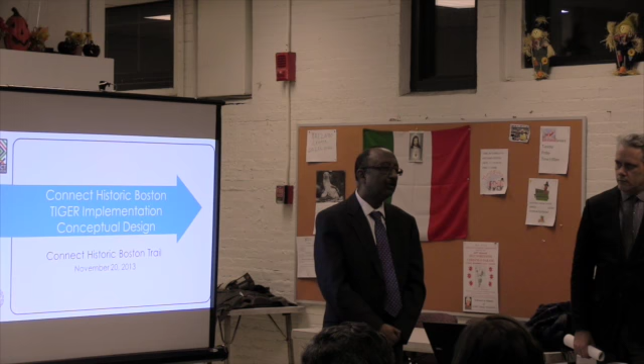About two years ago, we came to your community and did some presentations on installing what we call a cycle track, which is a protected bike lane in either direction, protected in the sense that it's a portion of the road that pedestrians and cars cannot use.

Through those community meetings, you said, this is a good idea, but does it really work? Because you're taking away so much parking. This is a good idea, but what are the real implications?

As a result of your comments, we heard you loud and clear, and what you have on that section of Commercial Street are really two bike lanes, standard bike lanes in each direction. We didn't lose any parking, and that's the facility we have today.

So I just wanted to start the meeting by saying that's where we are coming from, and we realize that you care about bicycles and making sure they are accommodated, but you also care about pedestrian friendliness, making it safe for pedestrians, and you also care about ensuring that all the parking spaces on Commercial Street, each and every one of them, continues to remain.

So the proposal that we have for you today, we think accomplishes all those three things. Not only does it have a cycle track, a protected cycle track that is safe for bicycles, not only is it making it safer for pedestrians, but it's also protecting each and every parking space in this corridor. So that's my introduction. We'll get into the details of what this proposal is in a second.

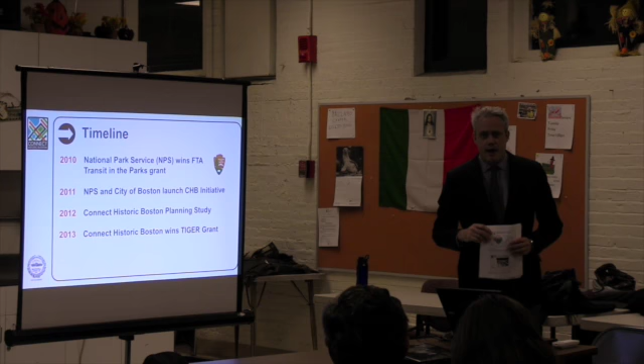And then in 2013, this past summer, the city won a very competitive process called the Tiger Grant. Tiger stands for Transportation Investment Generating Economic Recovery. So there you go, that's what Tiger stands for. Very apropos for a federal program. And because it's about economic recovery, there is a fast track in the grant, so construction is anticipated to begin next year.

So the Connect Historic Boston Initiative, these were some of the main products of that effort. It developed guidelines, and we'll talk about some of those tonight, on how to make it easy to travel throughout Boston and how to connect between the different modes. The guidelines address those principles. And I'll show later, there is a website for the project, and I'll show the address. All this information is available on that website, so I encourage you to take the time to visit it and review this information in more detail.

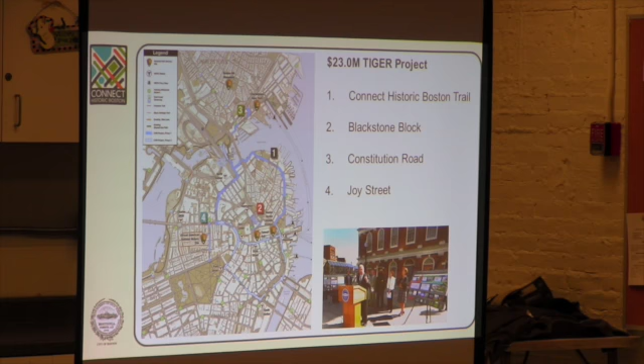I want to focus on the components that were funded through the federal Tiger grant. The first phase is what we're calling the Connect Historic Boston Trail, shown here in blue. Tonight we'll be talking about Atlantic and Commercial. Tomorrow night there's a public meeting about the next piece of the trail on Causeway and Staniford Street. There are also other community meetings happening about the project on Constitution Road in Charlestown, as well as the project on Joy Street in Beacon Hill.

So again, we're here to talk about this phase one of the trail, the pieces I talked about, and a closer look at the context for the trail.

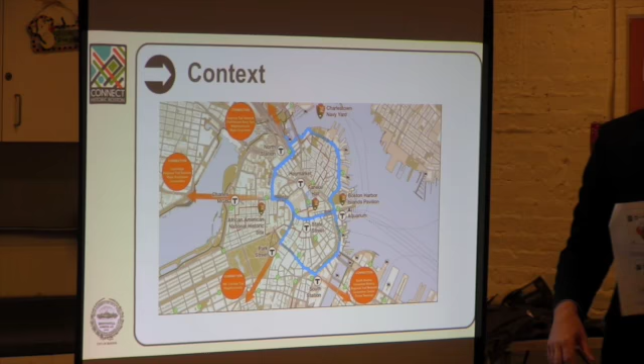Again, the vision is to create a trail. We call it a trail because our goal is to bring the experience of an off-street trail to the streets, to create a safe, comfortable environment for walking and bicycling on city streets. The goal is to connect destinations throughout downtown to the regional trail network, connecting to the trails along the Esplanade, to other communities, the Southwest Corridor, or other communities adjacent to downtown.

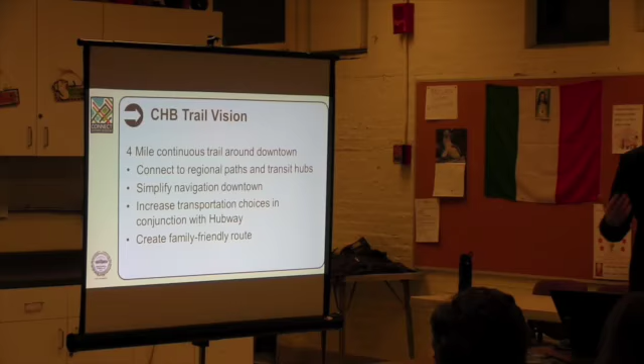The blue line shows what we see as the backbone of that downtown trail. It's a 4-mile continuous facility, and our goal is to help simplify navigation. Those of you who try to bicycle downtown know that it can often be difficult. The one-way streets or challenging streets can make it difficult to navigate.

So we want to help simplify that both for residents and visitors. We also want to increase transportation choice, providing a facility type that appeals to more people. We know some people are comfortable riding in mixed traffic or in bike lanes next to moving traffic, but we want to design a system that appeals to a broader segment of the population and create a route that works for everyone, whether it's children and families. We'll see some more images of what that means.

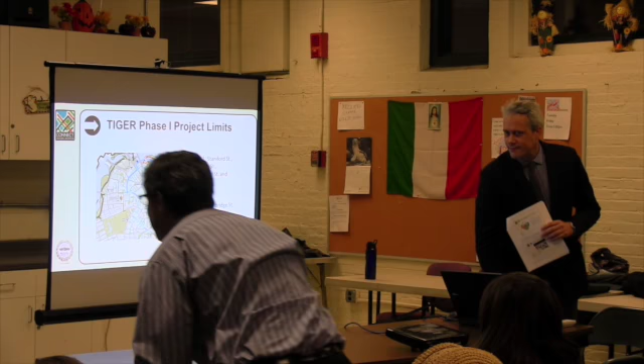So again, talking about phase one of the trail. This whole piece is phase one: Staniford, Causeway, Commercial, and Atlantic. Tonight we're going to talk about the pieces outlined in red, Commercial and Atlantic.

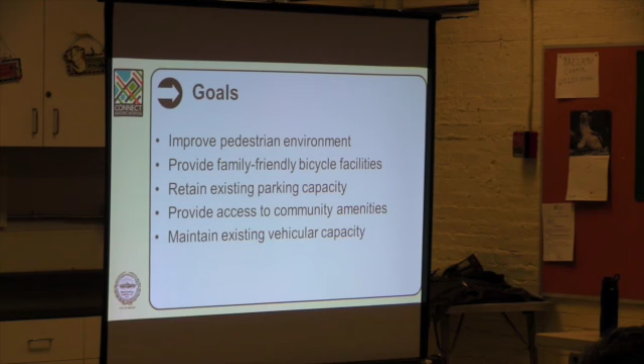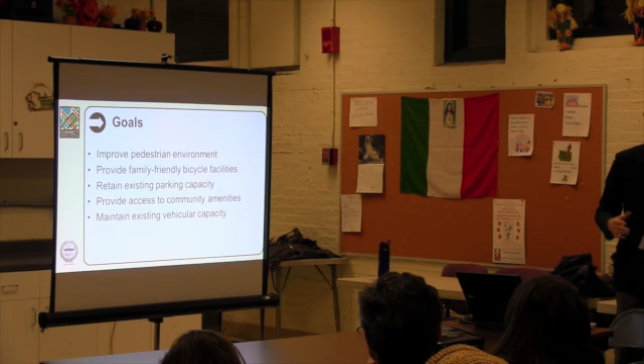I think Vineet touched on this already, but these are our overarching goals for this project. We want to improve the pedestrian environment. We also want to provide bicycle facilities that appeal to a broad segment of the population, our shorthand for that is family-friendly routes. It's important, especially in the North End, that we retain the existing on-street parking capacity. We also want to provide direct access to community amenities.

We want to help North End residents connect by bike, whether it's to the Greenway or to the trails along the Esplanade, providing those connections. It's also important we recognize that streets serve all types of vehicles, motor vehicles as well, and we want to look at maintaining existing motor vehicle capacity as part of the project.

The proposal we're going to look at tonight in detail, as was mentioned, involves converting the existing bicycle lanes to a two-way cycle track, and I'll talk about the definition of that shortly. As part of the project, we're looking to adjust the location of some street furniture and redesign bus stops to make them more efficient, but also as a way to optimize the parking capacity.

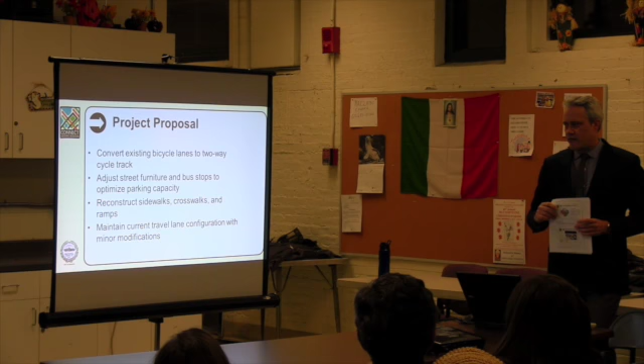We're making improvements for other users as well. We're going to be reconstructing sidewalks, making them smooth, putting in new crosswalks, and also new ADA accessible ramps for accessing the crosswalks from the sidewalk. As I mentioned, we're also maintaining the current travel lane configuration. There'll be no change to the number of lanes, though there will be some minor modifications in some locations, but the basic configuration will stay the same.

So cycle track is kind of a technical term. Another common term used for them is a protected bike lane.

The key to cycle tracks is that they provide a much higher sense of comfort for a broader segment of the population. By definition, they're physically separated from travel lanes, as well as from pedestrians and the sidewalk. They do take a little more space than bike lanes, and have special considerations for street crossings.

There are two images below, one based on research looking at the entire population to see what it would take to get people to bicycle more. We know there's a small percentage of the population, the strong and fearless, who will bicycle anywhere - they'd be okay on Storrow Drive, comfortable racing fast and riding with traffic. A larger percentage, the enthused and confident, are the ones you see commuting, mixing with traffic, riding in bike lanes.

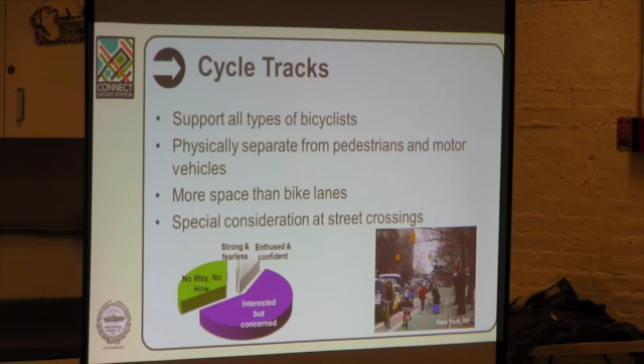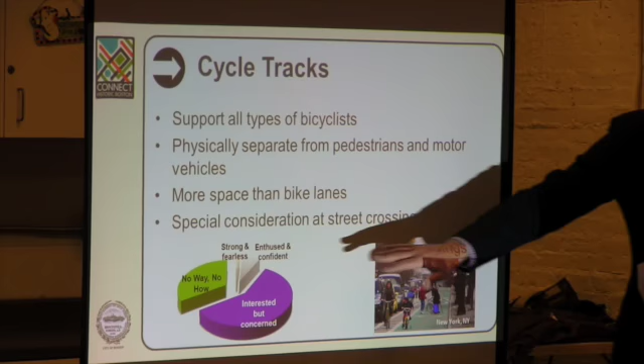There's also a population not very interested in bicycling, the green pie there - that's not a population we're interested in. But we know there's a very large piece of the population, shown in purple, who would like to bicycle but are concerned about their safety and about mixing with traffic. Provided the right facility type, they would bicycle more. That's the population we're interested in attracting with these facilities.

There's an image of a cycle track in New York City. You can see it's separate from the sidewalk, off screen. Here, on-street parking protects the bike lanes from the travel lanes.

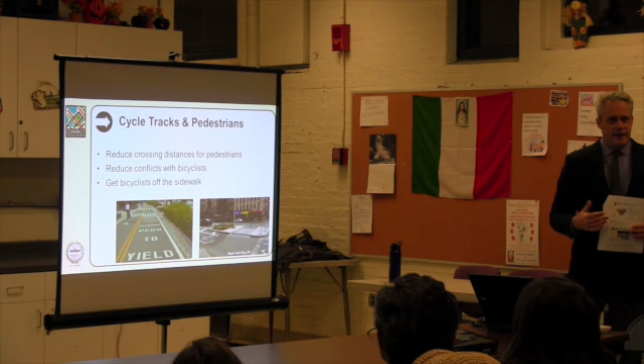As I mentioned, these facilities can also benefit pedestrians. Many of these facilities are being installed in cities across the country, and there's a lot of research being done. The research is showing that they actually have benefits for all users.

One of the main benefits is that they reduce the amount of bicycling happening on sidewalks by people who want to bike but don't want to ride in the street. A cycle track can provide a safe place for them to ride, away from motor vehicles and away from the sidewalk. They also can reduce conflicts with bicycles in the roadway.

Here are a couple of examples. They allow you to speak directly to bicyclists. In many cases, you want to have direct crossings across the cycle track, providing a method of yielding to pedestrians.

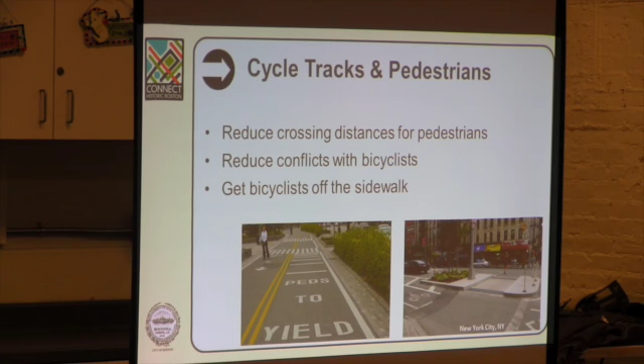One of the other main benefits is that it helps reduce the amount of roadway a pedestrian has to cross. Right now, with bike lanes, those are part of the street. With a cycle track, you're not crossing those bike lanes anymore, so your street crossing exposure to motor vehicles is about 10 feet less.

And with that, I'll turn it over to Dave, who's going to talk about our design proposal.

Thanks, Nick. My name is Dave Matt, and I'm with Howard Stein Hudson, the lead consultant on the project. We've worked with Nick and Toole Design Group on many projects throughout the city. As bicycling's been more of a focus of the city, Toole has been doing a share of that work, and Howard Stein Hudson's been working alongside them on many of those projects.

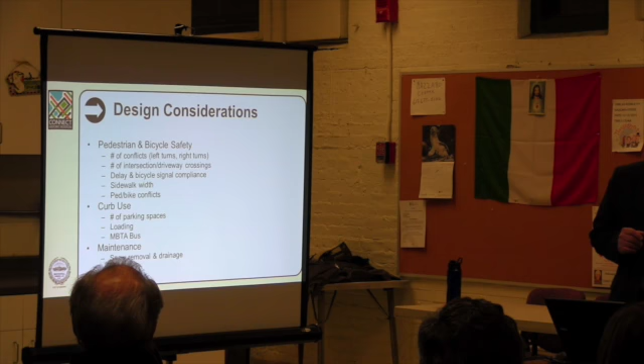When we looked at this project to determine the type of design worth considering and presenting to the public, we evaluated many different alignments of a cycle track within the North End in particular. That included evaluating the safety of where that facility would be, in terms of conflicts - whether there are many driveway conflicts or intersection conflicts with parking.

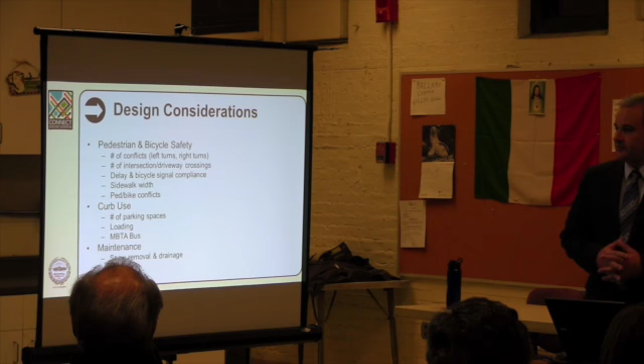We also looked at evaluating the delay for bicycles, vehicles, and pedestrians across different alternatives. And we looked at curb use - obviously the big theme here was no net loss of parking. So we evaluated concepts comparing those criteria.

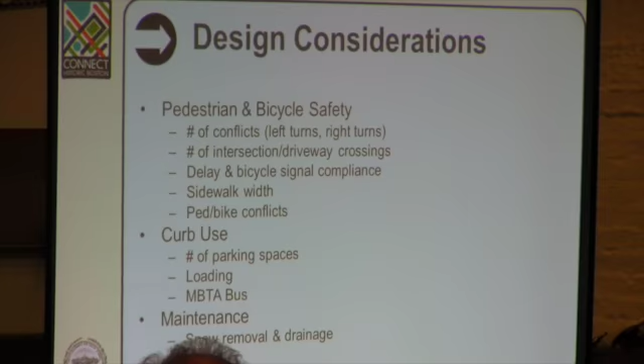We also looked at maintenance, which is going to be a big issue. It makes sense to put in a facility that can be plowed in the wintertime and is always open to travel for bicyclists. That's another thing we looked at as well - and again, the big theme: no net loss of parking.

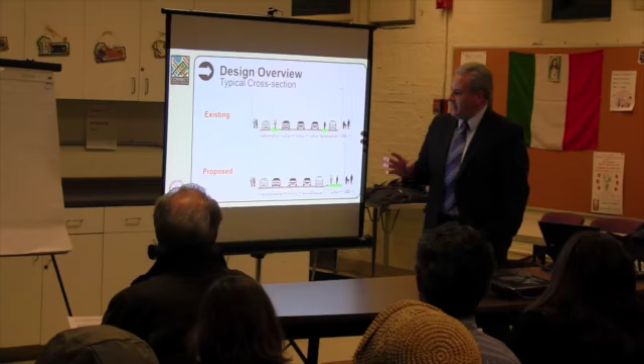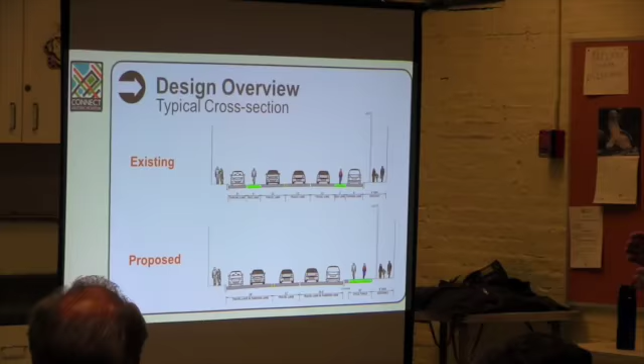So just to compare the existing and proposed here: today we have one travel lane heading southbound on Commercial Street, two northbound, and on either side there's a bike lane that exists today, and we have parking on either side. So the cross-section is limited. Obviously, we're not planning on expanding to the neighborhood side or expanding the road cross-section to the waterfront side. We're working within the existing cross-section.

So what we looked at doing is taking those two, basically a 5-foot and a 5-foot bike lane, and shrinking the lanes a half foot on both this side and this side. And what we end up with is a bike facility off-road, a 10-foot cycle track, and a 2-foot to 3-foot buffer.

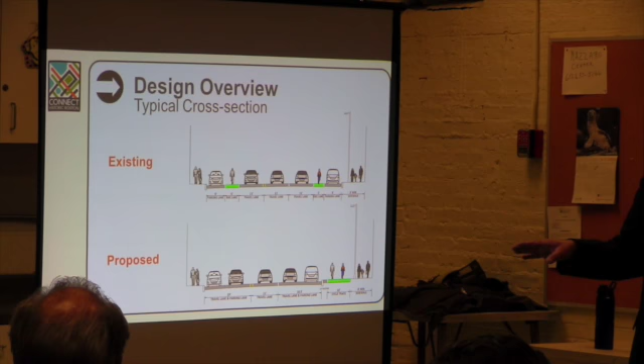It's an elevated cycle track, 6 inches above the pavement generally, and it's at the same elevation generally as the sidewalk. Now this varies throughout the cross section. I'm going to go through that a little bit here.

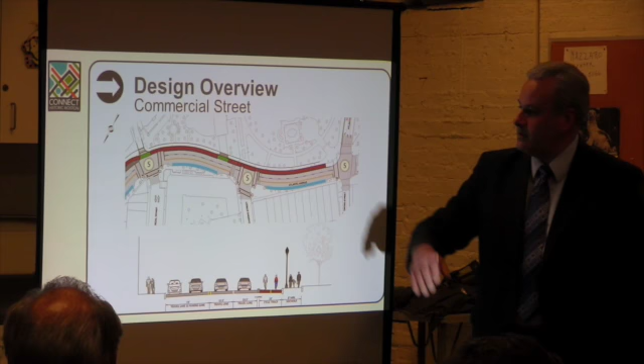The project starts at Christopher Columbus Park and heads all the way north to in front of Langone Field on Commercial Street. So this section here, which is basically from the intersection of Atlantic Avenue at Cross Street over to where Joe's American Bar and Grill is, at that signalized intersection.

Over there in that section, today there is no parking along the park side. And we recognize that as the location where there'd probably be the most friction between pedestrians and bicyclists.

So what we've looked at doing in this section only is maintaining that existing curb for the sidewalk, not touching that piece of the sidewalk. Keeping the cycle track, a 10-foot cycle track that is separated from the pedestrian realm and the vehicle realm by a 1-foot granite edge stone, and separated from vehicle traffic. So it's at the same elevation as vehicle traffic, but it's also separated from pedestrians.

There's a lot of brick paving along here that gets expensive also to replace, and so we really didn't want to get into that too much over here.

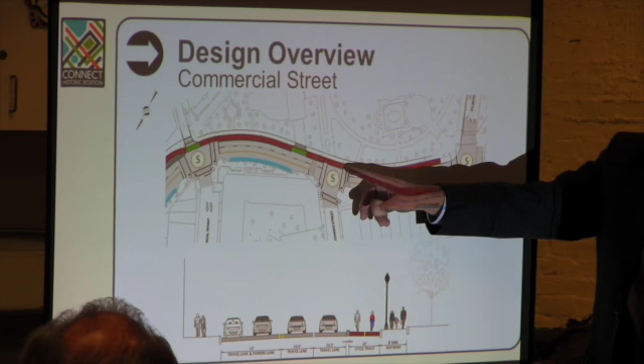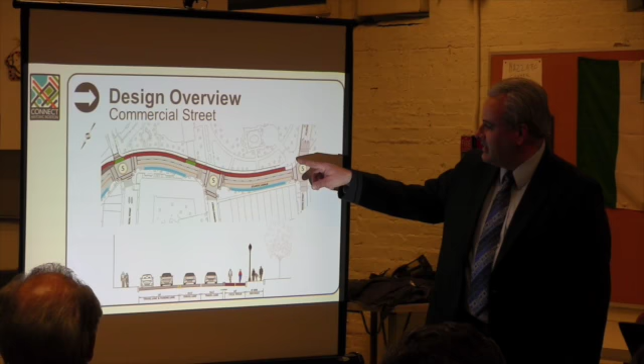At the crossings over here also, there'll be breaks in that buffer granite piece, so that we can cross through the bike cycle track to the existing crosswalks on Commercial Street towards Christopher Columbus Park. So again, this whole thing will be basically ramped down from sidewalk level and will run flush with the surface level that's out there today.

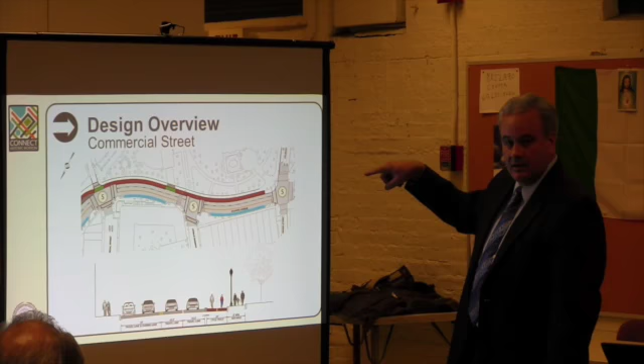One of the things that we're still working through is how this connects to the next phase of the project, how it connects to the bicycle lane that's out here today and the bicycle lane that's on Purchase Street. So we're working through those pieces of the project right now, and when we come back to you mid-December, we'll hopefully have that piece figured out. But this is the piece that we're at right now.

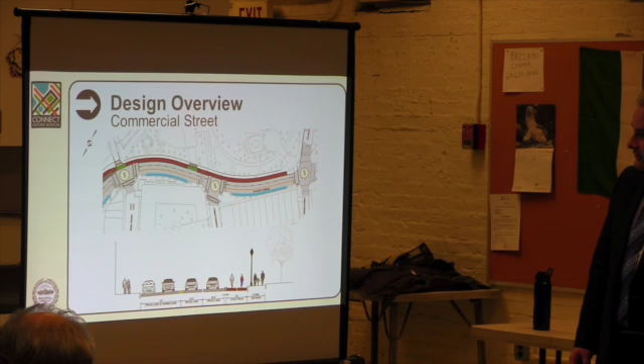One other thing I should say, for you folks that live in the North End, you might see the survey crews out there actively working. We're gathering a lot of data quickly to come up to speed to be able to submit these 25% plans in December. So you'll see crews out there working, and we're still understanding really what's out there so that we can incorporate the existing information into the design.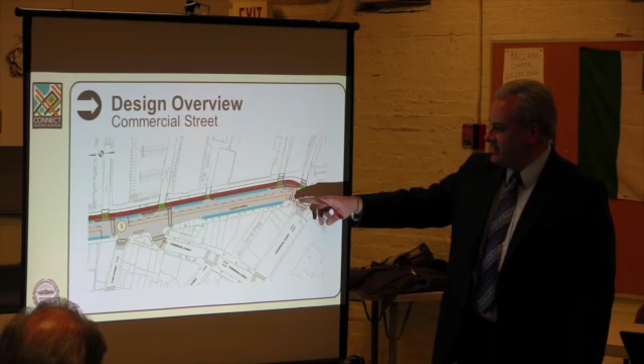So this is working a little bit further north, and this is really where the parking starts. There's a bus stop over at this location that we would maintain, and so the cycle track would ramp up to the sidewalk level.

And at every one of these driveways, you'll see as we advance through the slides, what we're doing is we're bumping out the sidewalk. So the sidewalk now would be further out into the street.

That by Joe's Aquarium? Joe's Grill, yeah, right over here. Joe's American Bar and Grill.

One of the other things is that this light gray over here basically would be a driveway treatment, a driveway ramp up to meet existing. So this cycle track would not be ramping down at any of these driveways. It'd be on a continuous elevation at the same elevation as the sidewalk.

And generally, we'll have no less than a 10-foot sidewalk throughout the project. Now, that's the other thing that's pretty important here, and Nick touched upon it: not only are we bringing the curb line out essentially 12 to 13 feet, but we're also reconstructing all of the sidewalk on that side of the street. So it'll all be a concrete sidewalk.

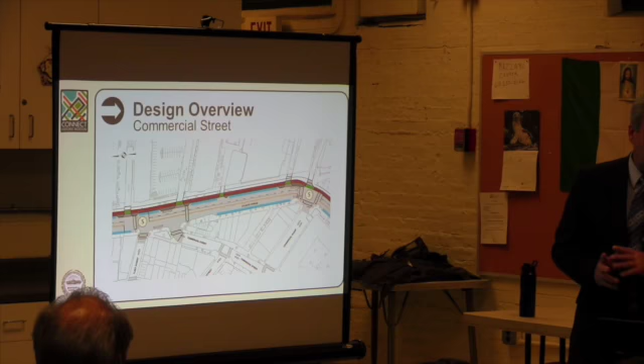And it'll be ADA accessible. Right now there are a lot of elements of that sidewalk that do not meet current ADA, and we're planning on fixing all of that. The other good thing about where we're putting the cycle track is generally we're avoiding some of the trees and other utilities that exist along the curb line.

We do plan on looking at each one of the tree pit locations, hydrant locations, street lights and signs, and relocating all of that to make more sense to separate the cyclists from the pedestrians, so there's some sort of visual division between the two.

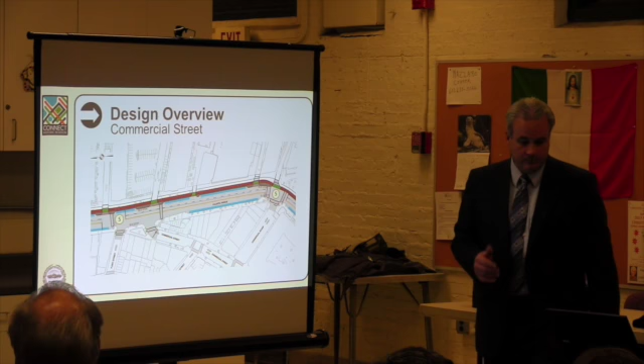The blue strips are parking. So you can see that we're maintaining the parking that exists along the curb lines there.

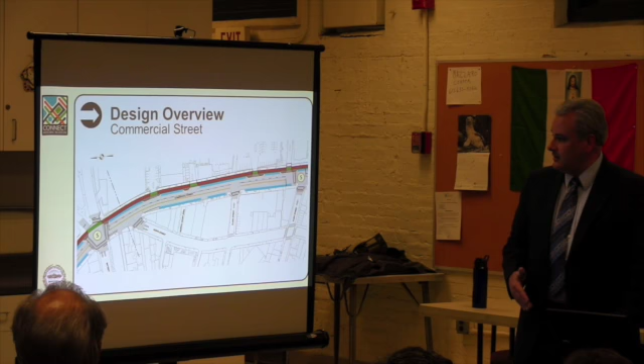So this is just working a little bit further up, again at Fleet Street, the signal there. We are bumping out so that at the ped crossing, we have a place for the peds to land outside of the cycle track and then cross the cycle track to the sidewalk side. At each one of the signalized locations where there's a crosswalk, we are bumping that out to have a landing for pedestrians beyond the cycle track.

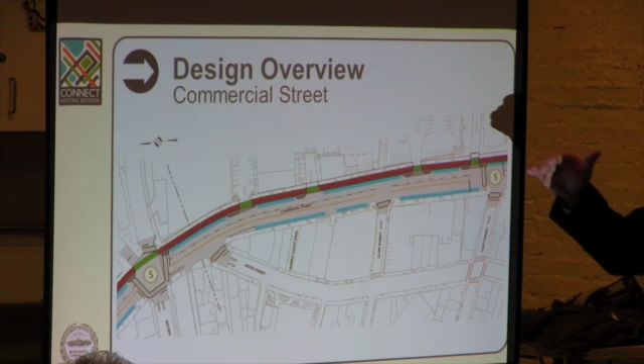On this side of the street there's less friction generally, because on the other side there's much more pedestrian activity and there's also streets. On the other side there's fewer parking spaces and some larger parking areas, but generally there's less traffic crossing the sidewalk and cycle track on that side. That's another reason why we chose that side of the street for the cycle track location.

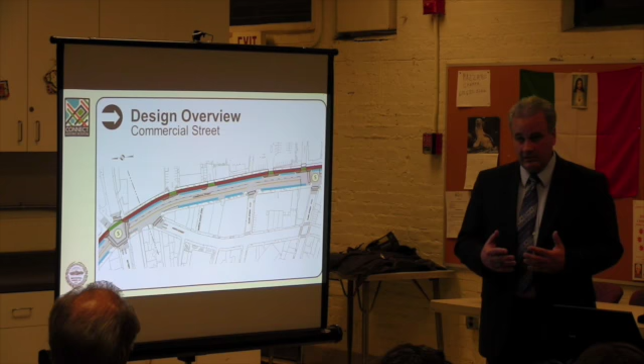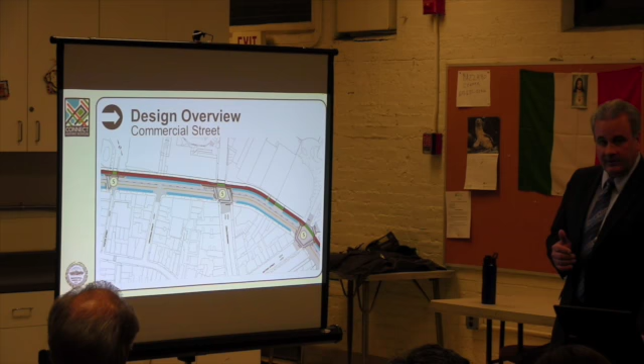We're not modifying any parking or curbs along that side of the street. We are going to look for opportunities on that side where we might be able to get more parking in. There are a couple of opportunities we've seen, so we might incorporate, or will likely incorporate, that into the plan to hopefully end up at a benefit to parking as opposed to net no loss. But it's something we're still evaluating as we get the survey in.

Here's an instance at Hanover Street where today there's a bus stop on this side of the street, and we actually gain a parking space. We lose it somewhere else, lose one, gain two. So where parking is along that side of the street might vary a little bit, but generally we're making things a little bit more efficient.

So in this area, for instance, we might locate a fire hydrant that might be restricting the potential for parking at another location. So we look at relocating hydrants or moving a bus stop to better accommodate the parking.

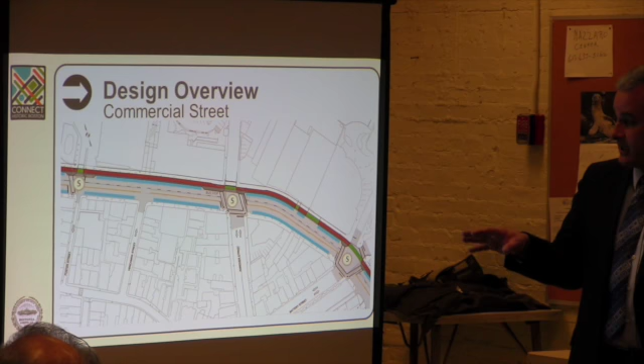Also, it's important at these intersections to have good sight distance for vehicles turning into and out of these driveways and parking lots. That's another good reason for bump outs at those locations, so that as vehicles turn in, they can see a bike coming, or vice versa, a bike can see a car turning into those side streets.

This is towards the north end of the project where we have Langone Field and the bocce courts. And here, again, we're maintaining the parking on the waterfront side.

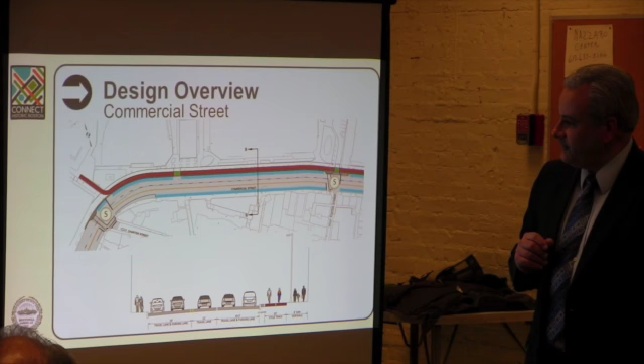At some of these intersections, we may be bringing the cycle track from a 10-foot section down to an 8-foot section, so that we can slow some of the bicyclists as they're approaching areas where there'd be more friction or activity at a driveway. That might be something we'd do as part of our design, but generally it'll be a 10-foot wide facility. This is where the ice arena is, and essentially our project would end right about here.

And we would match into what Nick had shown you before, going underneath North Washington, behind the development, underneath North Washington Street Bridge, down Beverly Street Extension, and back onto Causeway.

We're looking at opportunities, understanding what the parking situation is out here. At some events, it's double parked. One of the advantages of having a cycle track is you're not going to park a vehicle in a bike lane anymore and obstruct bike lanes. Now you'll have a curbed facility that people won't be able to park on.

However, off-peak, there may be opportunities for double parking that exists out there today, so I'm not going to say that.

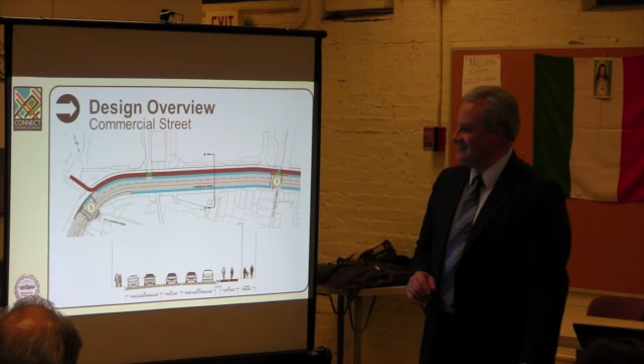We're also looking at whether or not it makes sense to go behind, along the waterfront and the existing trail, to prevent the intermingling of friction that occurs in this area. So that's something we're evaluating as well.

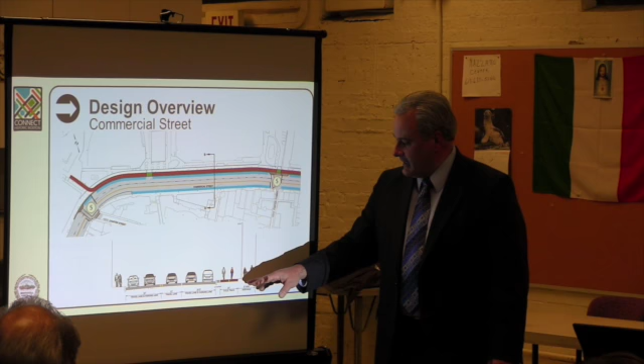Down in this section, we have a 2-foot buffer, but this will vary between 2 feet and 3 feet, and then the cycle track, and then the pedestrian area, which here is a minimum of 8 feet, but we're looking at getting at least 10 feet. Our survey's coming back, and I think we can accommodate at least 10 feet in all locations of the sidewalk on that side of the street.

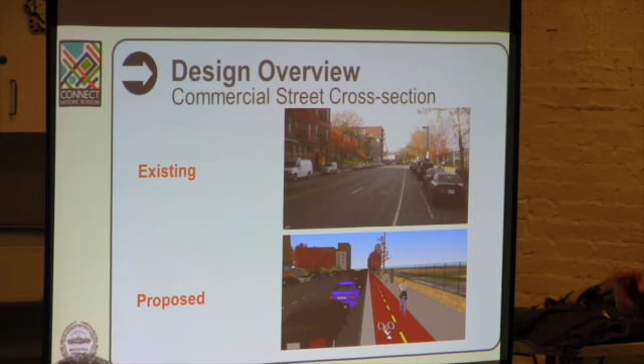So just to compare what's out there today as to what we're proposing: today you can see this lane going, the parking, the existing on-street bike lane, 2 travel lanes northbound, 1 southbound, a bike lane, and then parking on the other side.

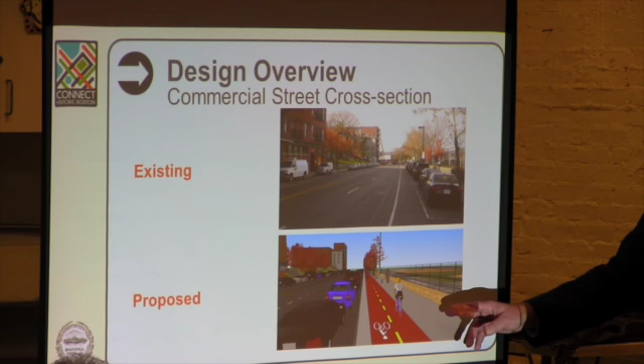And here's that buffer we talked about, the cycle track, and the sidewalk. This is from basically a bike perspective. A little bit over towards the pedestrian line, you can see the comparison that we're really sharing the facility here, and this balance of bike and ped, managing all of the on-street parking, and the 2 lanes. We're not losing any lanes of travel as part of this.

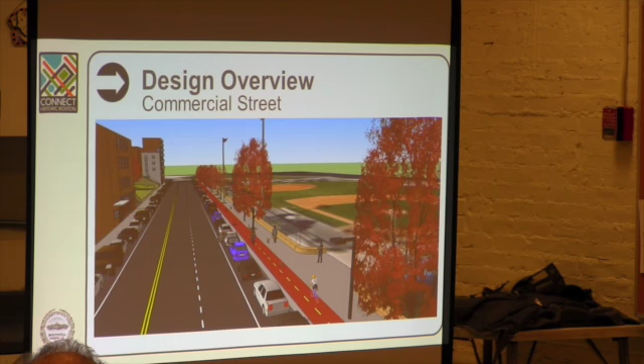As Nick mentioned, we're submitting 25% design in December, so it's a lot of work to do in a short amount of time. But we plan on coming back to you well before then to listen to anything you have to say tonight and incorporate whatever we can into the design. Then in May, we will be submitting 100% design to Federal Highway, looking for our final approvals, and advertising in September.

So we thought we'd rush through the presentation and then open it up for discussion. As just mentioned, we will come back to you mid-December before any final decisions are taken, so we can show how we've incorporated any comments we hear today or get online or through other means. We just want to make that promise right now.

So with that, we'll open it up for discussion. We can go to any relevant slide that you like, we have other information. I'll identify people as they raise their hands.

Yes, ma'am, we know one another. This is Dr. Francine Gannon, lifelong resident of the North End. Just a little bit of clarification relative to your opening remarks.

Sure. Two years ago, yes, the city did come to the community and explain the proposal for the bike lanes. Yes, as a community we did in fact think it was a nice idea. However, we left that meeting and expressed concern, just as you said, about public safety and pedestrian crossings. Of course, the North End is filled with a great deal of elderly. Yes, we did all that. However, I think when we left that room, the concern was that we didn't think it would be viable for our neighborhood because of that concern.

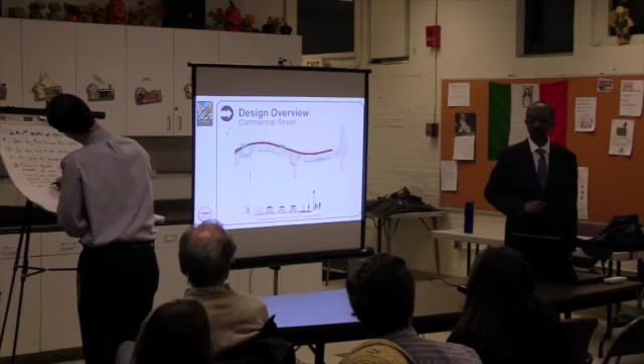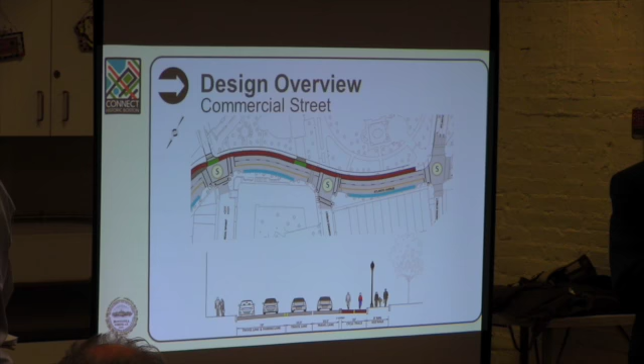Not on sidewalk level. Yeah, I think that's where you really need it, on sidewalk level. Because there was an incident just recently, as vehicles make... and I know you said you're going to address the situation later. It's actually not on the road, it's separate. I understand. Yeah, I understand, because there's a bicycle lane right there now on Atlantic Avenue.

Right, but as you make that turn, I ask you, please, drive a regular vehicle in that lane. When you make that turn, those vehicles inevitably go into the bicycle lane. For some reason, that's a tough turn, and especially a truck - I'm very, very honest with you - if it's a van or a larger vehicle, it goes into that cycling lane.

That's really basically my concern, because I almost just witnessed someone being hit not too long ago, and that happened there. But I'm very concerned. I do like the idea, just so you know, that it is two ways, and we're keeping the bicycles all on one side. Are we eliminating the bicycle lanes that are along Atlantic and Commercial Street on the other side? I think it's wonderful that they're together, but I'm concerned.

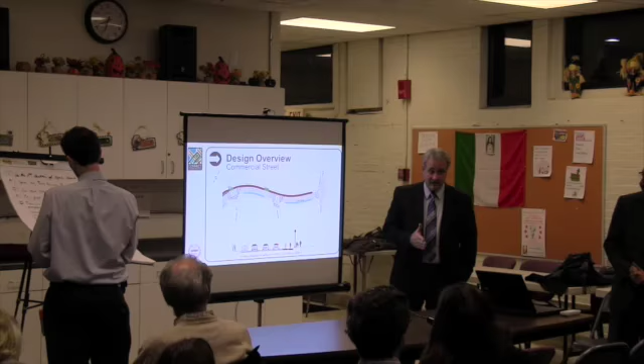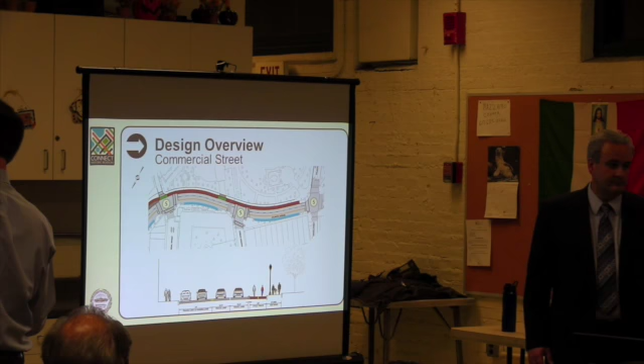One of the things we are proposing to do - this is the existing curb line here - we're proposing to change that curb line so it doesn't allow for that sweeping right turn. We're modifying that curb, that corner, to come out essentially to one travel lane. I would even say, you can think I'm crazy, but I would rather cut it back and keep a cyclist further back rather than bring it out, because it separates them. I'm telling you, vehicles themselves have a very hard time making that right-hand turn, they really inevitably go over.

And also, we're making sure there's a separation between that travel lane and the bike facility. So there's a physical, albeit slightly low, but physical separation, so unless they ride the curb, they actually can't get into the cycle track. That's major, that's really my concern, and I'm glad it's going to be addressed. Thank you.

And I'm glad to see that they're staying together in the two bicycle lanes coming further back, because I could never understand - when I was growing up, when we hiked or bicycled, we didn't bicycle with the traffic. I mean, we did as kids, and you took a chance. Whenever you did, you always faced the traffic, because if you saw a vehicle turning or swerving towards you, you could see it and get the ability to get out of the way. But I'm glad to hear that, that's my major concern.

We will, when we come back next time, explain in a little more detail how we're going to make it safer. And you're going to have the sidewalk go from Joe's American Bar and Grill all the way around, all the way up to the ice rink? That's terrific, that's the goal. Thank you for your comment, really appreciate it. All the way around, that's terrific. Thanks very much.

Yes, ma'am. Hello, my name is Ann Moritz, I live at 63 Atlantic Ave. I have two questions. One, those wonderful graphic renditions show absolutely no parking meters.

Will the parking pay stations become a part of this design? And my other question is, are your conversations and planning - which is terrific, by the way, I think this is wonderful good news - are they happening in tandem with other conversations in the city about preparedness for sea level rise and storm surges, or are those conversations occurring independently? Okay, let me answer the first question first.

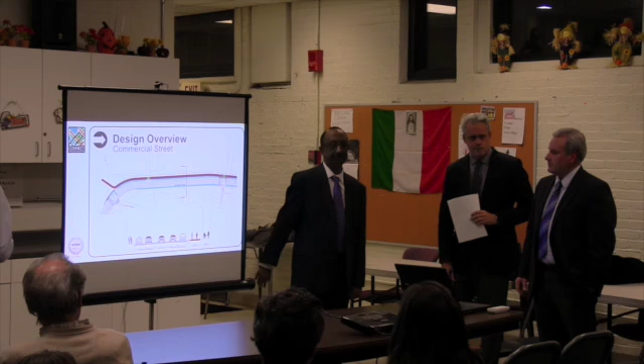So she's talking about cars going across, exiting the driveway. They would have to go up onto the sidewalk and then back down, since currently this level is the same as the street. Pedestrians, just like any curb on most sidewalks - for instance, on my sidewalk, my driveway at home is at the same level as the sidewalk.

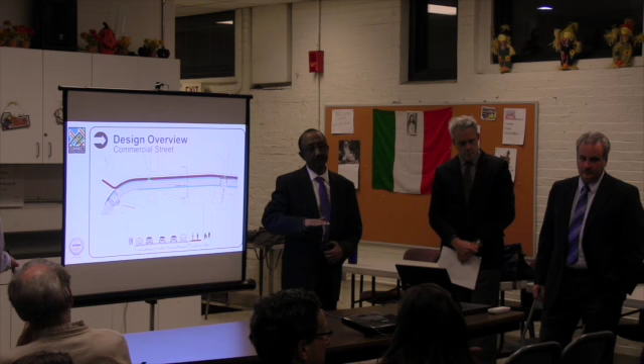What if the driveway was at the same level as the street instead? That's typically the case in this particular area, so the driveway, as you're coming out, is at street level. Generally, the driveway for most developments on the waterfront side are at street level - you come to the sidewalk and have to go up a little, then come to the street. In some cases, the driveway cuts right through the sidewalk and the sidewalk stops on both sides, but when we're finished, the sidewalk will be continuous throughout Commercial Street.

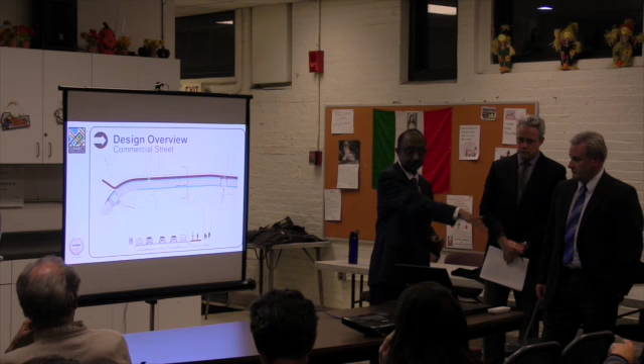So if you're coming out of your driveway in a car, you'd have to bump up a little before you come to the street - all of those sidewalks will have to go up. But it's not like that now for all of them, though it will be. It really depends on the topography of the driveway and how it currently interacts with the road.

We have to drain it, and we also have to make sure the sidewalks meet ADA. So this area right here, for instance, we have to make sure the cross slope on that portion of the sidewalk meets disabilities requirements. In other words, it can't have a slope greater than a certain percentage, 2%, for instance, over here. So we'll ramp them up, but we can't violate accessibility regulations.

Wouldn't it meet ADA if you're on the sidewalk and it's all the same level? Right, it will be the same level through here, from where we're ramping up, essentially from the street to the driveway.

She's looking at it from a driver's perspective. You're trying to make sure that drivers coming out are made to pause a little bit before they get onto Commercial Street, so that they mix in traffic in a more safe manner and are more conscious of that.

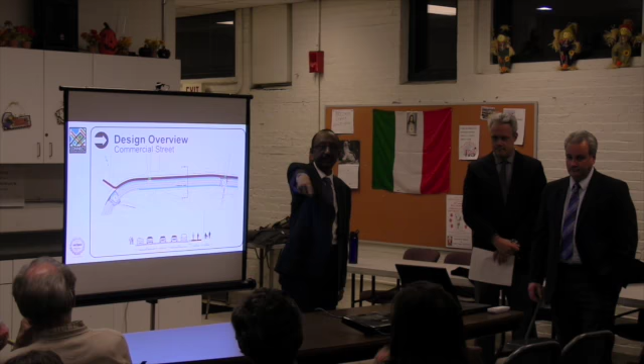Hi, Kara Oberg. I live at 84 Prince Street in Boston. I bike, I walk, I take transit, and I drive. And I fully support the cycle track throughout the city. I think it's an amazing opportunity for North End and the city of Boston overall. I also commend all of you for the public process. The fact that we're having this conversation at conceptual design is not common practice for Boston or anywhere in the country, really. So the fact that we're all getting together and having this conversation is amazing.

And I'd like to go on record as a North End resident to challenge you guys to reduce parking. As a resident, I'd like to go on record. Thank you to a lifelong resident. Thank you.

Bostonians in general, you may not get out of here alive. Yeah, I'll walk you out the door.

I'm Steve Miller. I'm on the board of Livable Streets Alliance, and I want to compliment you particularly for the way this makes it safer for pedestrians. I think it makes a huge difference. I always think of my mother trying to walk down a sidewalk, and she could actually do this, given the changes you're making. So I think there's a number of pieces that really make this safer for the residents and for whoever else is coming through.

I have two thoughts on the bicycle piece. One, I understand why you're going to route the path along the river as you approach Washington Street Bridge, but the reality is that most people, if they're really being careful, will take that path, but if they're commuting or trying to get somewhere else, they're going to stay on the road. So you should be thinking about how this ties in with future projects going over the Washington Street Bridge and through Causeway Street. The connection here should be thought of as on-street as well as off-street.

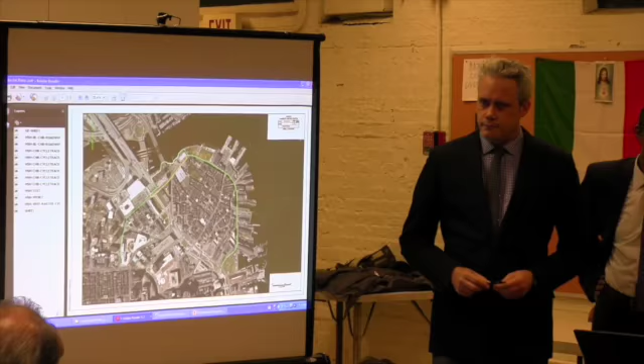No, there is a path that goes under, but there are some pathways that connect closer to the bridge. There's one that comes up almost right next to it, at least from what I was looking at on the satellite. And when Lovejoy Wharf is finished, it will come out inside Lovejoy Wharf - that's why it's going to be on the other side. But before that, when you're on the path, there's at least a way to make a path that comes back just before you hit the bridge, so people could go over to Charlestown, coming around Commercial and onto North Washington.

One day - we've been talking to the people doing some of the early drawings for the reconstruction of that bridge, which would be a long time from now. But there's potential for having a cycle track that would go over that and connect to the Rutherford Greenway being built in Charlestown along the side of Rutherford Avenue, so it could be another node. We can definitely look into that. I think some of you might know we are redesigning the North Washington Street Bridge, and as part of that project there will be significant accommodation for pedestrians and bicycles.

We would think about how people coming from Charlestown—and I know somebody said they lived in Charlestown—how at this intersection where Commercial Street, Causeway Street, and North Washington Street merge, that would connect back to the cycle facilities on Commercial Street as well as Causeway Street. So we're very cognizant of that. We are severely constrained because road widths get very narrow at both approaches from Causeway and from Commercial. And because, at least for the Connect Historic Boston project, the goal was to encourage family-friendly facilities, we went around and underneath and back.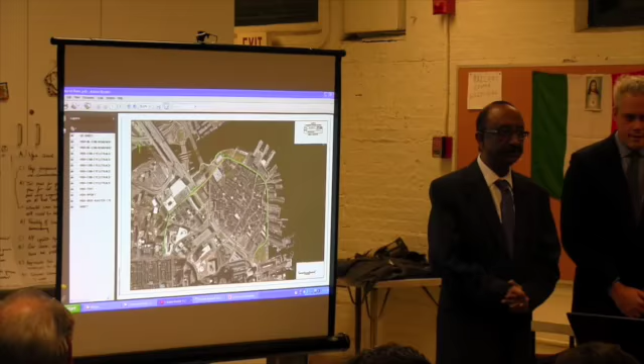So where does this leave the Segway storage? Touche, Matt. I didn't want to ask that question. Well, you got to ask it, right?

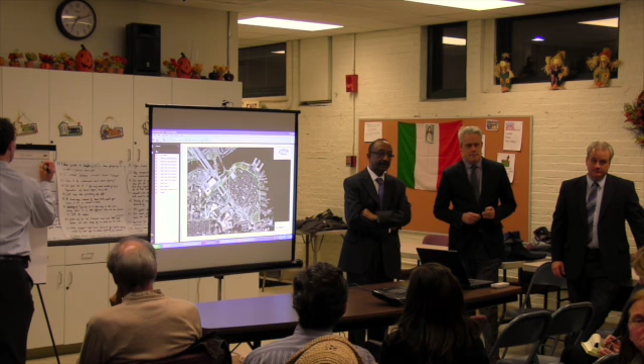The reason I ask is, you're really expanding the sidewalk, right? And the Segways were on the sidewalks, and then they were put in the bike lane under the new ordinance. And the ordinance, as it reads—correct me if I'm wrong—says they have to be with motorized vehicles. Correct. So does that still put them in the roadway? It would not be—this is a sidewalk-level facility.

It's a good point. I don't have a legal answer to your question. We'll have to look at that in more detail. But intuitively, the idea of not having Segways on a sidewalk because they conflict with pedestrians would apply here as well. That's my intuitive sense, but there must be a legal answer I'm probably not in a position to speak to.

I hope you look right at it, because now it's not just the conflict with pedestrians, it's the conflict with bicyclists. That's what I'm saying—intuitively, with Segways in the bicycle lanes, bicyclists go faster than Segways, so the bicyclists have to go around them. So if that happens on the sidewalk, where are the bicyclists going to go?

We'll get to it at the next meeting when we come back in mid-December—I'll try to get you a better answer.

I just wanted to address a question about the design of the driveways, because this is a difference from a standard bike lane. I think the question was how we're designing the intersection. So one of the conflicts we're looking to manage is vehicles making turns.

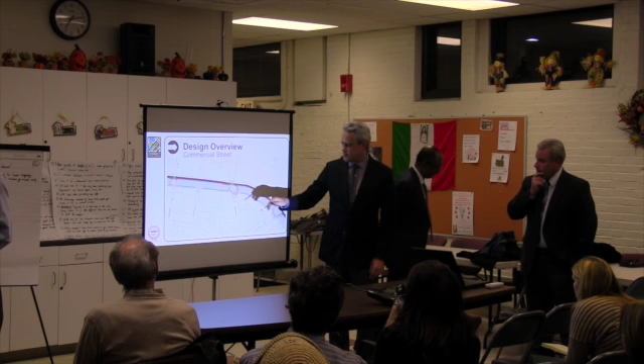This is signalized—let's go to the uncontrolled one, right here, well this one here. So we have vehicles making left-hand turns and right-hand turns, and we also have bicycles traveling here on the sidewalk. One of the things we're doing now as we develop the design is analyzing those conflicts, looking at strategies to ensure safe sight distance—both for the driver turning to see bicyclists, and for bicyclists to see drivers.

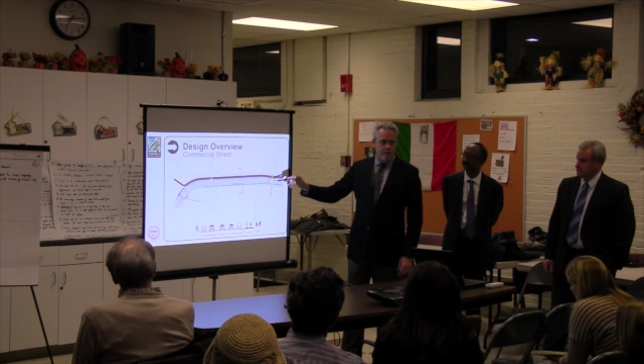One of the things we're doing is trying to look at strategies that slow down both users at these conflict points. That's one of the primary benefits of the driveways—it slows the motor vehicles turning, giving them more chance to see bicyclists, to slow and yield. Similarly, we're looking at providing a slight bend in the cycle track at the intersection, again to slightly slow cyclists and orient them toward the roadway to improve visibility. So bringing speeds down is a strategy we're looking at.

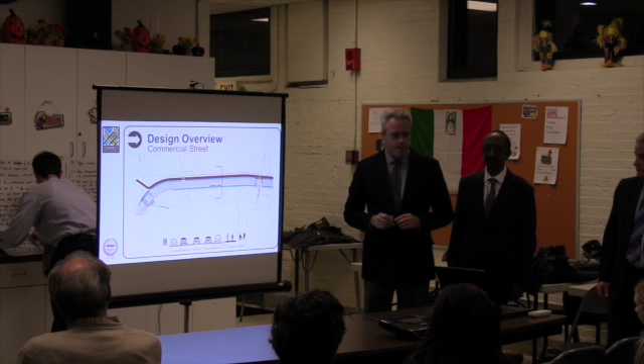I want to address all the new questions—so you haven't spoken yet.

Hi, Mark Heimovitz. I live at 357 Commercial Street, just before Battery Street. I was part of the original group a couple of years ago that Francine mentioned, and I'm still fully supportive of the lanes we have out there now, and like almost everyone in that group, opposed to the cycle track for several reasons, not including the parking. I'd like to hear—I think I may have missed it—how we're having no net loss in parking. And I should preface it by saying, I don't own a car. I use Hubway.

If I need a car very few times, I use Zipcar. So personally, it doesn't impact me, the loss of parking, but it does impact the neighborhood and the businesses. And people have visitors that come in.

One of the other reasons we opposed the cycle track as opposed to what's out there now is because we were already losing a travel lane for cars. But then it was also being narrowed a little bit, those lanes, and I know it still fell within the federal regulations and all that. And now with the cycle track, we're going to lose a little bit more of the travel space. I think, did you say half a foot? Half a foot, yeah, on each side.

Now, it may not sound like a lot, but my concern is that folks who live on that street or walk that street, I've seen many close calls of head-ons because as much as we don't want to have people double parking, it happens at the ball fields, all summer long it happens. The funeral home, and I know we're not talking about there, but the funeral home double parking goes back further in that way. It's a serious concern because when cars are double parked, some cars actually do the right thing and double park outside of the bike lane, which is good, but it pushes the cars out, so when cars go to pass it, especially coming the other way with just the one lane, there's been many, I don't know if there's been actual ones, but I've seen several near head-ons, and that's a concern.

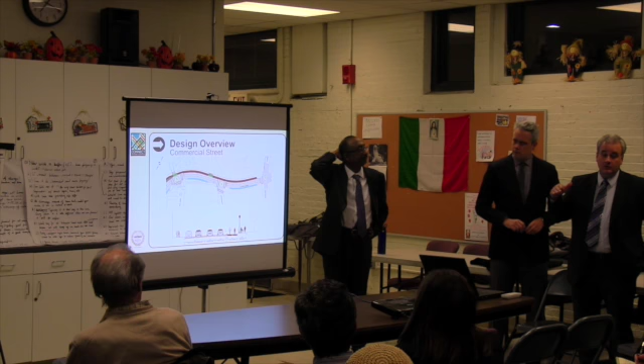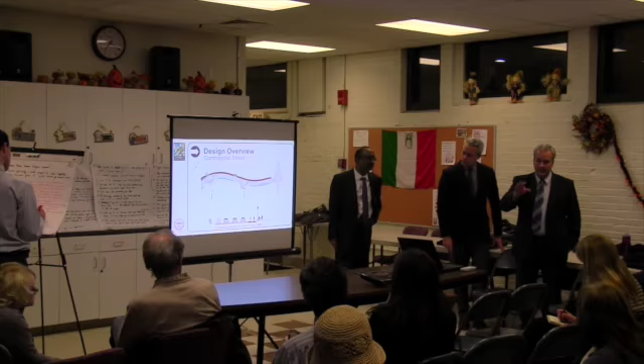Actually, I'd be interested in it. We recently, over the past couple of weeks, took new traffic volumes along the entire stretch, and we also took traffic volumes before we looked at these bike lanes. So we'll compare that, and as part of the evaluation, we have to put together a functional design report to show Federal Highway and the City of Boston how this stretch will operate from a vehicular perspective. If there's a need to do better coordination of signals, or adjust green times at a particular signal because demands are different, we'll make that adjustment as part of this project.

When we come back in mid-December, can we do a special report comparing those numbers to see whether it's degraded, improved, or whatever? Yes, we will do that.

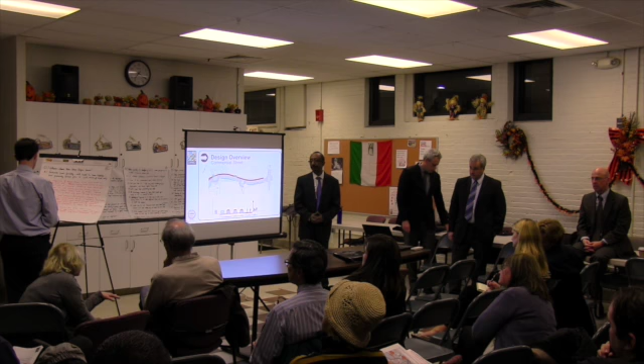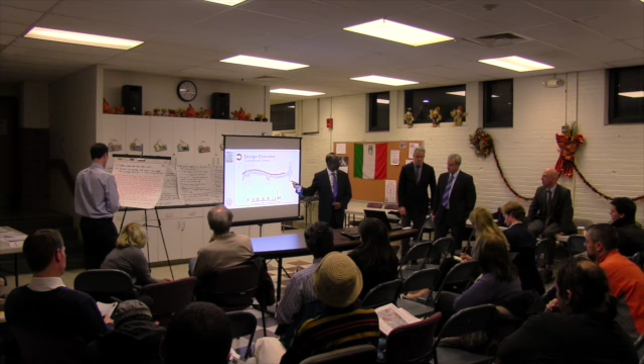I'm Anna Ragusa, 63 Atlantic. What I'm finding is bumper to bumper traffic. I have a deck, and all you see is bumper to bumper on that one lane. Also, people are now cutting from North Street so they don't hit that light, and they come down Lewis Street and down Commercial to get out. So you have traffic behind us, and I have a bedroom that looks over that traffic too. Do you know what I'm talking about? North Street, can you bring up that bigger map? You have to, because it's a one-way to Lewis Street. It's difficult to see on this map, but we're taking notes. We'll do that as part of the evaluation, since people are avoiding the traffic that's in front. Thank you.

If you're eliminating the bicycle lane on the right side, the neighborhood side, that would make that street a little wider for traffic flow. No, we're moving the whole lane to the other side, we're not widening it. You're absolutely right, as pointed out, we're still left with that one lane, and motorists can get squeezed there. We'll try to do that analysis. We've taken notes on that particular move from Lewis Street, then right on Commercial, out to Cross Street, and we'll try to see what we can do.

Is there anybody in the room who hasn't spoken yet who'd like to?

My name's Nick Schmidt. I don't live here, but I'm around sometimes, riding my bike or visiting a restaurant. I was just curious, have you looked at any opportunities to add bike parking? This is such a great facility that it will surely attract people, which is the point of it. I would think there could be space on some of the bulb-outs, possibly at the intersections, though that might affect sight distance. Good idea, we will definitely explore that as long as it's not obstructing pedestrians.

I'm going to go in this direction. Yes, sir? My question is about the bikes. If they don't stop, like someone said earlier about New York, where they go through red lights and don't stop, with the way the car lane is gonna be, if bikes don't stop at this intersection, you're gonna have serious problems. Is there gonna be citations given to bikes that don't stop? How is that gonna be addressed? We started ticketing bicyclists, we figured out a system to do that. We started over where we'd seen this problem rampant, in the Boston University area. It's something we want to do gradually, in tandem with a good education program. So it's definitely a concern for us, and enforcement might be one way to address that.

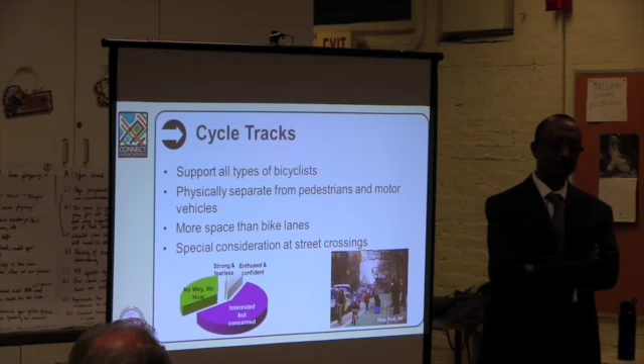The pie chart—essentially you had a section that was purple, and that was the largest piece of the pie. Someone earlier asked what the cars are getting other than being squeezed by 6 inches. That population in purple is often the concerned population, and those are the folks likely to cycle on a cycle track.

So what are the motorists getting? Well, you're getting a piece of that pie taken off the streets—people who are going to choose to go car free or car few, either leaving the car at home or finding another way to go. I think we might see a little relief in congestion on a commercial street. Who knows, we'll have to wait and find out. But I think that's a pretty big benefit to the car drivers.

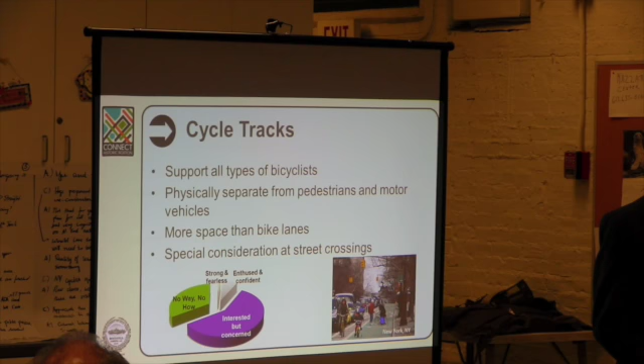I see a hand up from a person who has not spoken yet. Thank you. I was out collecting signatures and talking to some of the residents on the street. The Eliot School, the Eliot, is right there—that's a new school, brand new. There's an extended day facility there, and the parents said this is a really great opportunity for the kids. A lot of them said they couldn't make it to the meeting because they're working. Sure, just want to make sure their voices are heard. It's definitely something they would be interested in, and the Eliot uses that space a lot for the kids, so it would be really safe for that.

Thank you for that suggestion. I'm going to try to consolidate and close out the meeting. Two things: one, I think would it be fair for me to say that we are hearing general support for this concept to be installed on Commercial Street? Yes, with special emphasis on the traffic moving. And one other thing—I still want to refer to pedestrian safety.

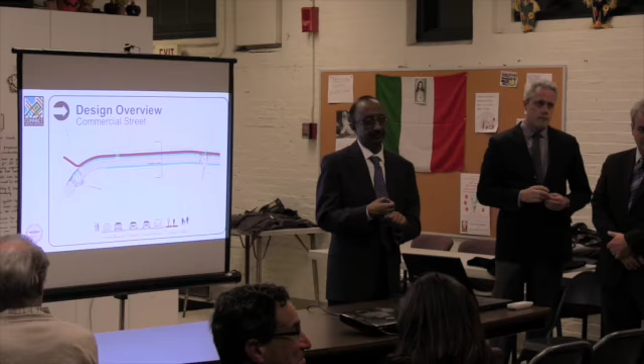I was just telling the gentleman here, we're back to the Eliot School where they're now located—they just moved into the new facility at 585 Commercial Street. I would ask you to please give special attention to where it makes the bend at the skating rink, at the end of Charter Street and Commercial Street. That is a very, very, very dangerous aspect, as people walking along the sidewalk have been pinned under a car coming around. That's very dangerous. I'm telling you, there's an accident there almost every week or every month.

I'm just saying, it was discussed at one point in time—I don't know if the $15 million would help—but it was talked about at one point, putting up barriers, speed bumps across to slow the traffic coming around, because you have no idea how they come around. I'm just afraid they'll end up even hitting the track. That's a very, very dangerous intersection. I'm sure if you check with the police department, if they registered those accidents that happened there, it's very, very dangerous. It should be really seriously looked at.

That's why the yellow light was set there, and no one really—we will look at that again, they come around there terribly. When we come back in December, we will try to show you how we have addressed some of the things you've asked us to do, including the backup on the approach to the park side of Atlantic Avenue, that one lane, and some of these intersections that have been pointed out. We'll do some research and try to get some answers—we may not have all of them, but we'll make a good faith effort.